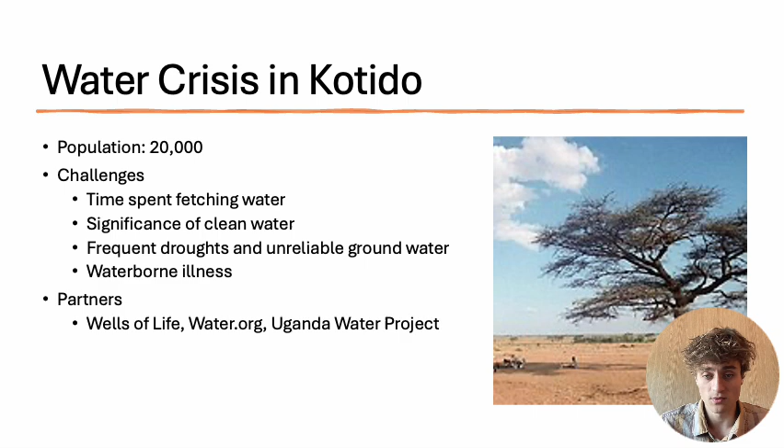This takes time away from economic activity, education, and growth for the community, so we want a solution. A water tower can give them extra time with clean access to water and the right to grow their community. We want to partner with Wells of Life, Water.org, and Uganda Water Projects to help support the community in areas where they may be lacking.

The next question is where in the town of Kotido we're going to place this water tower. The place we selected was based on topographical data—the most northern part of town had a higher elevation, and it was placed near the Kotido River, which would be a good source during wet seasons when it runs more strongly.

This allows us to have a gravity-fed water distribution system, which means less maintenance and need for pumps, lowering costs for a town that doesn't need extra expenses. They want the water tower to serve them, not something that constantly needs maintenance by people who may not have the expertise or time to do this.

Another way to solve the issue of being outside the power grid is to use solar-powered pumps if pumps are needed. These are both sustainable and easy to maintain, and this can help get the water into the water tower and ready to serve the community.

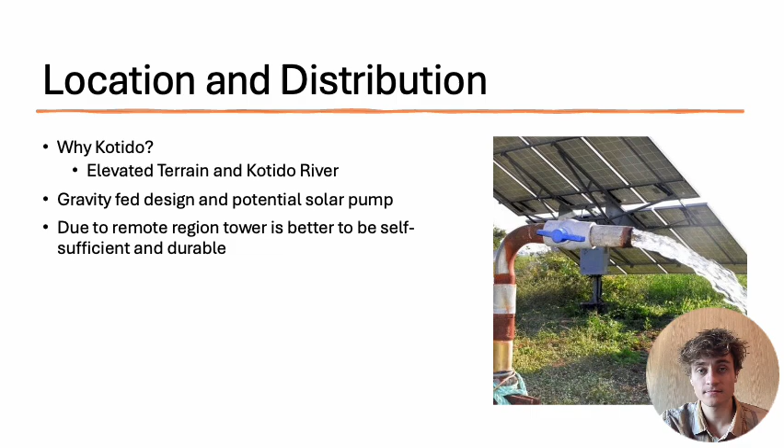Now for the vision and mission of this project: our goal is to serve about 20,000 people, each needing about half a gallon per day. This maps out to, for 2 weeks' worth of water supply, about 140,000 gallons of tank capacity.

This region tends to have a high amount of drought, so we wanted a medium-term solution rather than a short-term one where only 1 or 2 days of supply could support the population, after which people would have to fetch water again, wasting time they need. That's why we decided on a medium-term solution of about 2 weeks.

There's a study by WHO and UNICEF that says every $1 invested in clean water returns at least $4 in economic benefits. So despite the investment needed for the water tower, it will be paid back by the time saved, which can be invested in other things like education and economic activity.

If you do the math and say this saves about 15% of productivity, that translates to over $250,000 in GDP growth in that area. So the social investment pays for itself—it's not just a charity project. This makes sense to serve these people and give them clean water and dignity for the future: education, health, and economic transformation in the town. That is our goal, our vision, our mission.

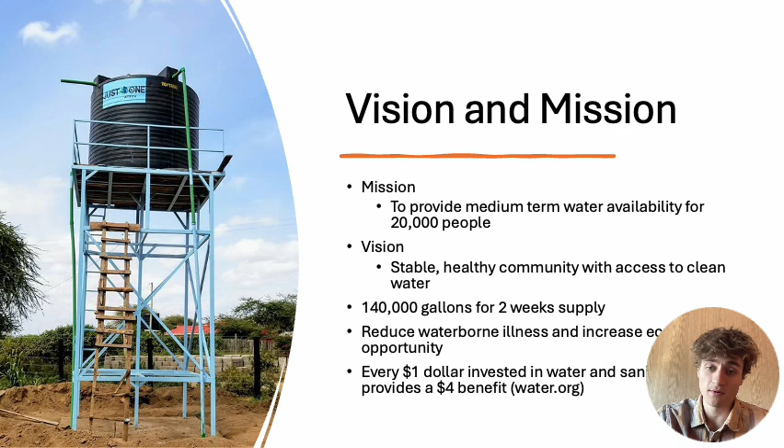Okay, so what are some other motivations for us to do this project? Under the Christian worldview and our views on human values, we learn from the Bible that all people were made in the image of God, from Genesis 1:27. Every single person has intrinsic value, and that means no person, no matter where they are or where they're from, deserves to be treated poorly or live in poor conditions that are non-dignifying.

Furthermore, Christians are called to serve the poor. So what are we doing if we're not helping people who are in need? As engineers lucky enough to go to college and gain these skills, these skills aren't ours—they're given to us by God to serve others, not to glorify ourselves. We want to use these skills to care for others, empower this community, and share the love of Christ. It could save so many lives and bring people to Christ.

So, yeah, we want them to have water access that enables them to have dignity, education, and further opportunity.

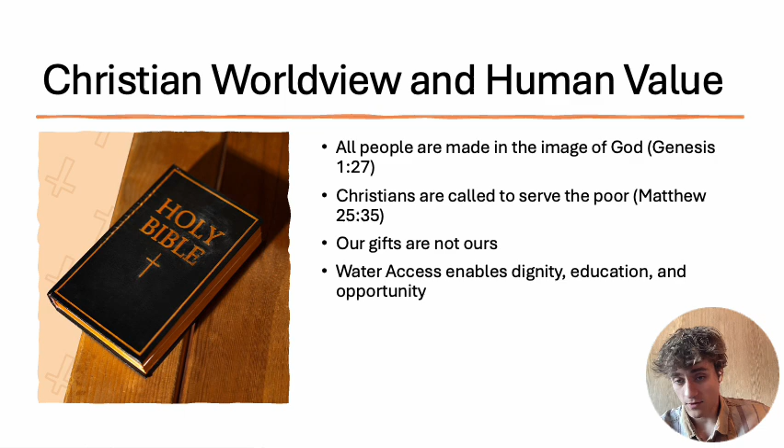Okay, so now let's get into the meat and bones of this project. We were tasked with designing two different water towers to be proposed for this area. As you already know, the tank capacity should be about 140,000 gallons. This produces a high vertical load onto the truss that we're going to be designing below. So we want this truss to be stable, cost effective, and easily constructible. It's not supposed to be the fanciest, highest water tower, because that's not easy to maintain—it's more likely to experience stress under load. It's just supposed to do its job, and do its job well.

So the tower can be up to 130 feet high. We certainly are not going to go that high, due to the reasons I just explained. The loads that a water tower usually has to withstand in a truss are simply the weight from the water in the tank, and the wind that blows on the tank. So we're going to be doing some simulations and hand calculations on the truss structure itself to see if it can handle the loads it will be experiencing, and then we can select the materials and truss design from there. We will make an evaluation of both of our designs based on cost, stability, simplicity, and the materials we use to see which water tower we choose.

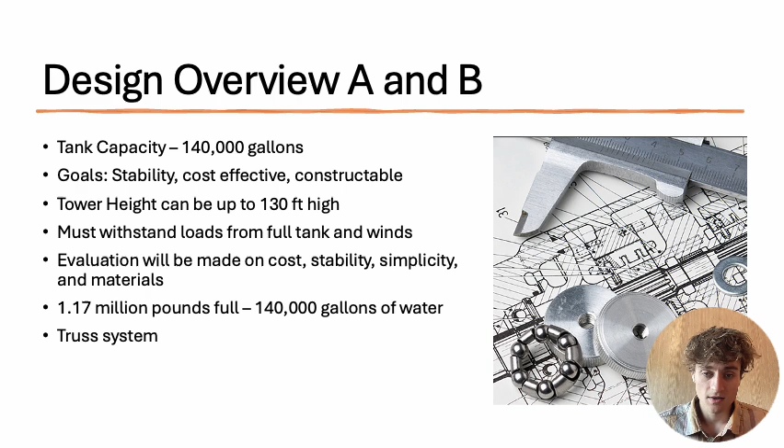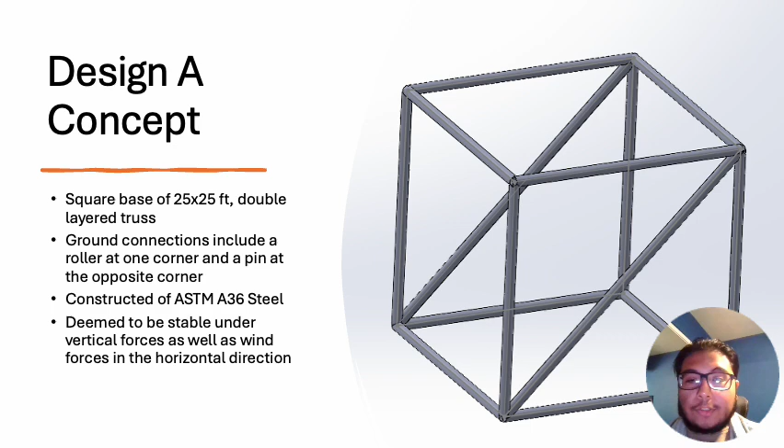Alright, so our first design concept, design A, features a square base of 25 by 25 feet with a double layer truss. For the ground connections, we have two opposite corners—one is a roller and the other is a pin. Through our simulations and hand calculations, this design was deemed able to support the wind forces in the horizontal as well as the vertical load forces.

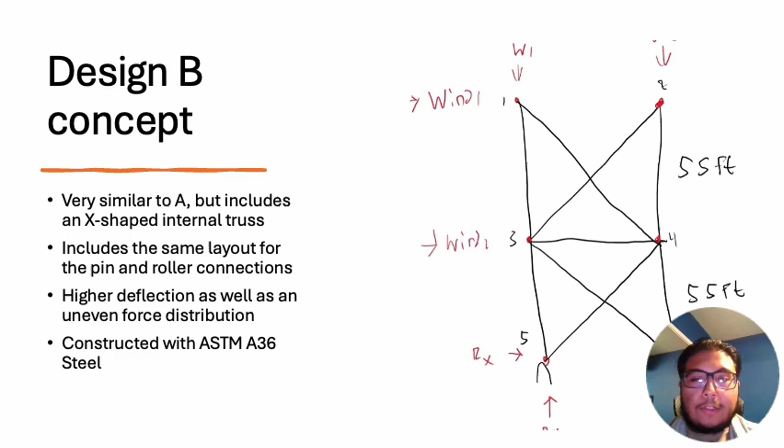Okay, so for design B, we had a very similar choice to design A; however, this one features an X-shaped internal truss. The same layout is used for the pin and roller connections in opposing corners. We ran into some issues with this one, where it has an overall higher deflection as well as an uneven force distribution. And of course, it's constructed with ASTM A36 steel.

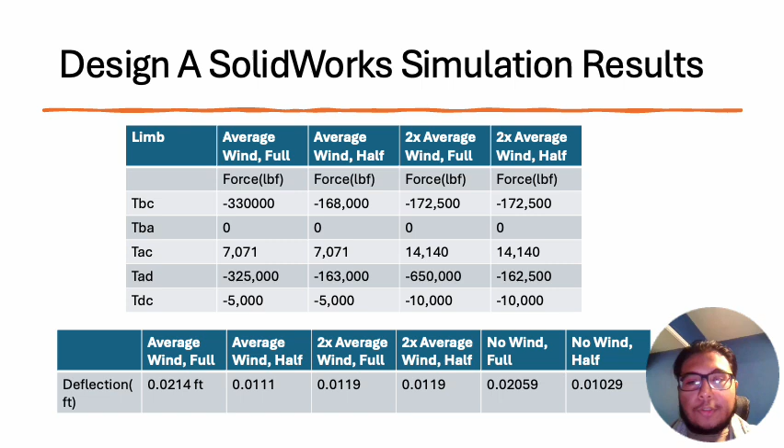Taking a look at design B simulation results, there's a lot of data here, but the important things to note are limbs F13, F24, F35, and F46. These are the vertical bars going through our structure, and they take on the most force compared to all the other limbs. The only other difference would be F34, our vertical bar in the middle of the structure, which also takes on some force, though not too much.

The rest are the X-shaped limbs. It's interesting that looking at just about every single limb here, none of them take on too much significant force. Especially F38, which takes on zero. F47 takes on considerably more than the rest, so that's something to note there.

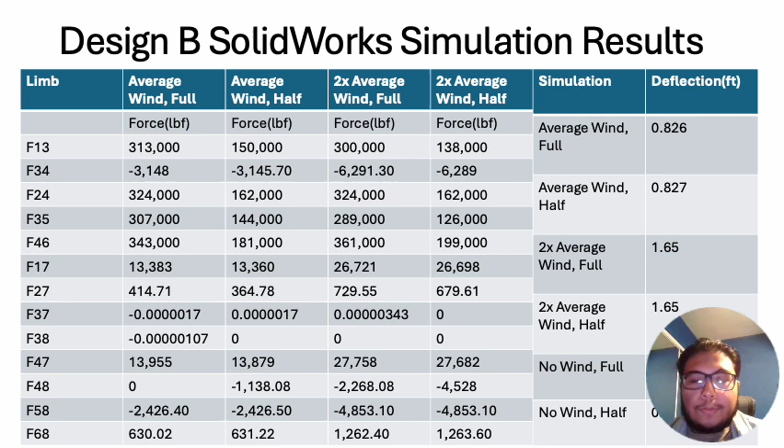Then we take a look at deflection. We have higher deflection overall on the structure compared to design A.

Here we have the hand calculations versus simulation data. We have two different graphs to keep things concise, one for design A and one for design B, graphing the force versus the truss member. This is simulation data for wind speed, average wind speed, at full capacity.

If you look at design A, there's no difference between the hand calculation and the simulation data, which is great because that gives us 0% error. On design B, if we look at the graph, you see slight differences in the hand calculations versus the simulation data. This still gives us a very low percent error of about 4.43% on average.

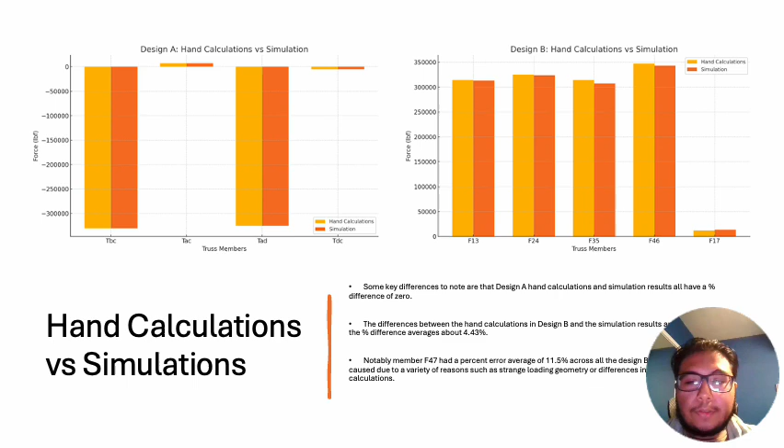Although there are some members that have a slightly higher percent error, such as member F47, which has a percent error of 11.5 on average. This could be due to any number of things, although most notably perhaps how SOLIDWORKS handles the geometry of the member or the calculations.

Here we have our truss load calculations. For design A and design B, they both use methods of joints. Design B is just a bit longer because we have more joints.

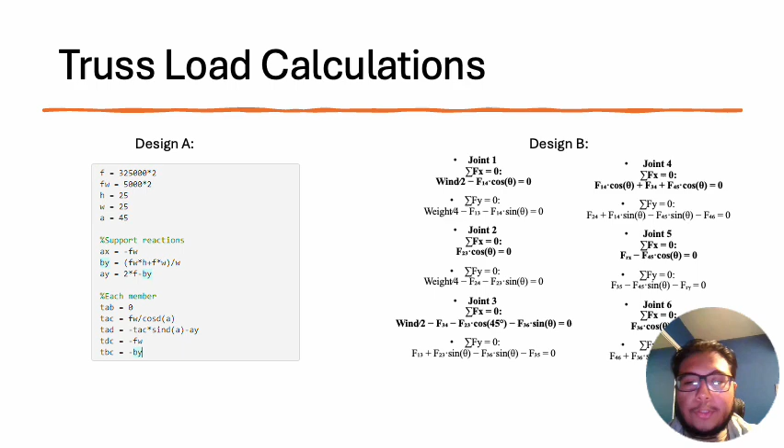We ultimately decided to go with design A over design B, and there are a couple reasons for that. First off, in design A, it looked as if the forces were being evenly distributed throughout the truss rather than just one or two specific areas like design B was. This would prevent early failure or a total loss in the water tower truss structure.

Also, when we did simulations in SolidWorks, design A had a lot lower deflection points, pretty much in every single condition that we applied. And then lastly, design A also had identical numbers when we compared it to our hand calculations and calculations we did in MATLAB. This ultimately proved that design A was the best choice for the current job needed.

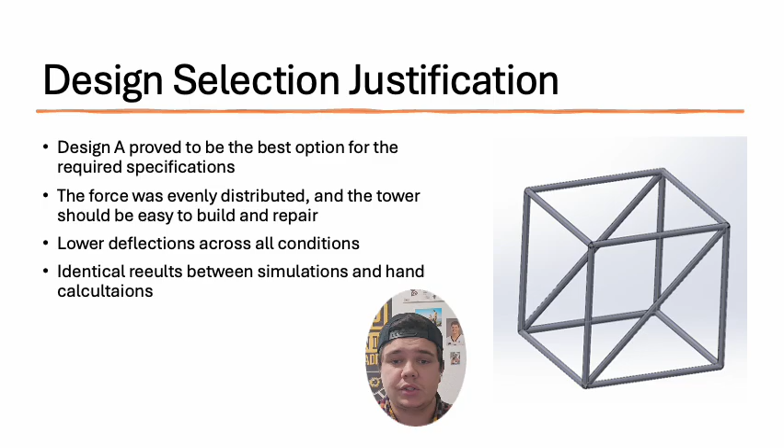Here is the product drawing that we had of design A. As you can see, it's that truss structure with pretty much just a square shape with that diagonal bar going across it just to give it a little bit more stability.

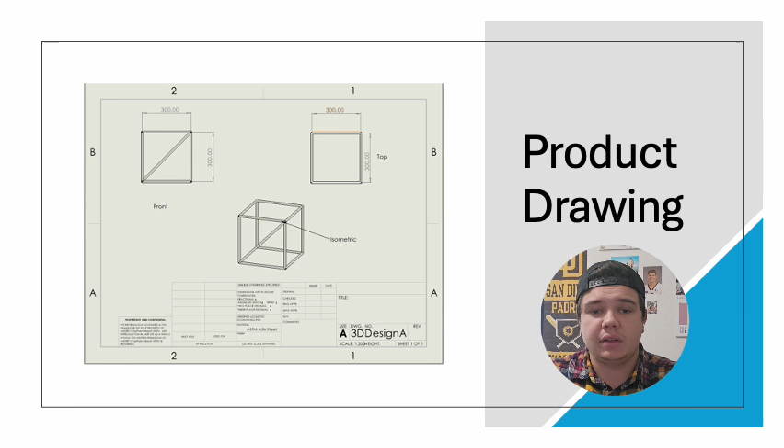This was the final design that we chose, and everything from that previous slide matches this truss structure that we had made.

These are all the materials that are going to be needed to start breaking ground and get that water tower fully assembled beginning to end.

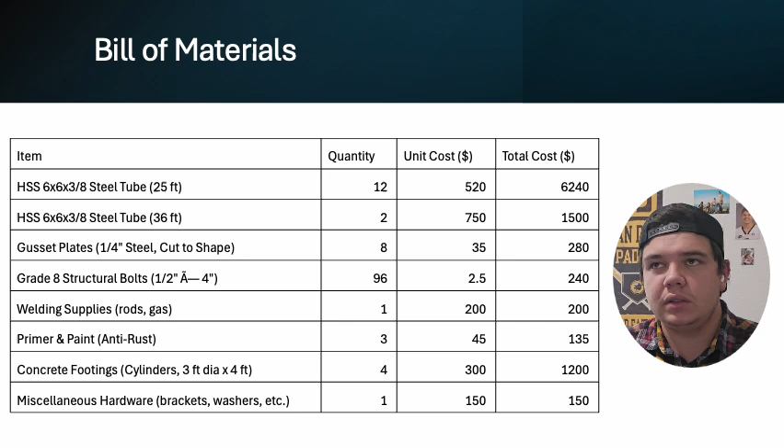So what we decided to do was use ASTM A36 steel, and we did a little bit of research on the sizes that we needed to give it the most stability. This is the amount that we have so far.

We need about 12 25-foot steel tubes, 2 36-foot steel tubes for the diagonal portion of the truss. We need some steel plates, grade 8 structural steel bolts, welding supplies to put a good chunk of this together, paint to protect the outside of the water tower, concrete footings to give it stability on the ground so that it's not going anywhere, because that would obviously not be good. And then some other miscellaneous hardware to factor in just in case we ran out of something or something else popped up that we may need.

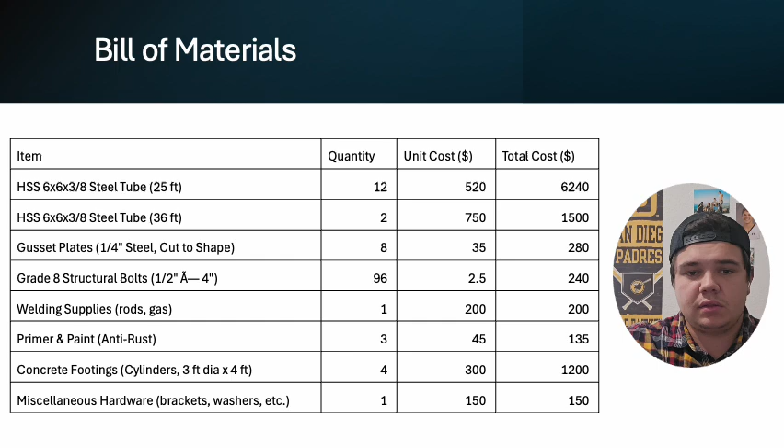And a grand total cost would roughly come out to be about 10,000 US dollars to get this water tower fully assembled beginning to end.

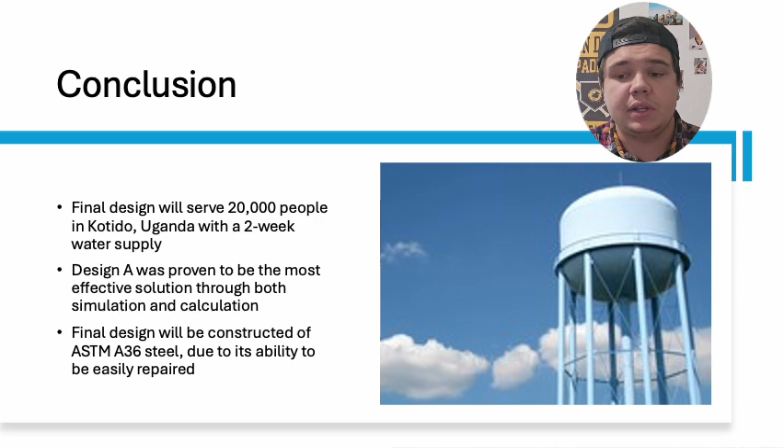To conclude everything we have gone over in this presentation, the final design will serve about 20,000 people in Kotido, Uganda, on approximately a 2-week water supply. Design A was proven to be the most beneficial, proved through both simulation and calculation. The final design will be constructed of ASTM A36 steel due to its ability to be easily repaired and manufactured.